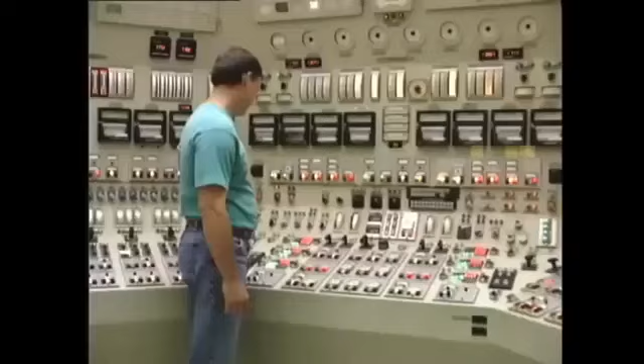We already studied the various turbine cycles and factors affecting efficiency at the beginning of this program. In this module, we'll look at the main features of turbine construction, including the various components and support systems such as gland steam, lube and hydraulic oil, and the condenser. The subject of turbine operation, control, and protection will be dealt with in the next module.

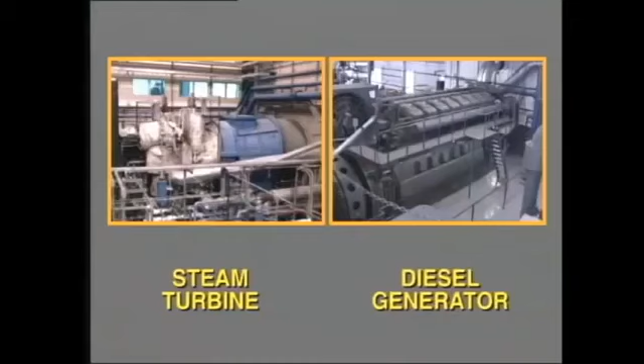The steam turbine is certainly one of the most popular prime movers, especially for driving large power generators. The size of steam turbines built and installed runs all the way from about 5 megawatts up to 1,000 megawatts or more. So what is it that makes the steam turbine the preferred prime mover in comparison with, say, the diesel engine? Well, there are quite a number of advantages, the main factor being that of physical size.

For example, a 30 megawatt steam turbine is probably smaller than a 5 megawatt diesel. Another advantage is that the steam turbine is far less complicated and contains very few moving parts. The moving parts are the rotor, which drives the generator, and the steam control valves and control gear.

The amount of vibration produced by a steam turbine generator and transmitted to the surrounding area is relatively low, provided, of course, that the machine is in good condition and is correctly installed and aligned. This makes for a quieter operating plant, particularly when compared with the diesel engine or even the gas turbine.

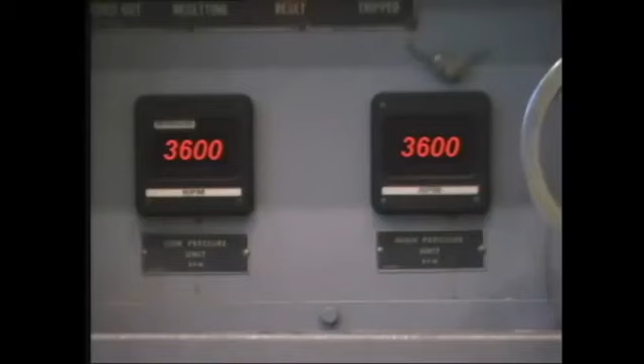The steam turbine runs at high speed, usually 3,600 RPM in North America or 3,000 RPM in Europe, and can therefore be coupled directly to a two-pole generator. Remembering that the diesel engine operates at around 200 RPM, we can see one of the reasons why the specific output of the steam turbine is much greater.

One other advantageous factor is the relative ease of controlling the output of the steam turbine. This is achieved simply by adjusting the amount of steam admitted to and flowing through the turbine. As we'll see later, admission valves, also known as control valves, are installed for this purpose.

The turbine stop valve, or valves, is located upstream of the control valves. In case of an emergency, the stop valve closes automatically, cutting off all steam supply to the turbine and bringing the machine to a halt.

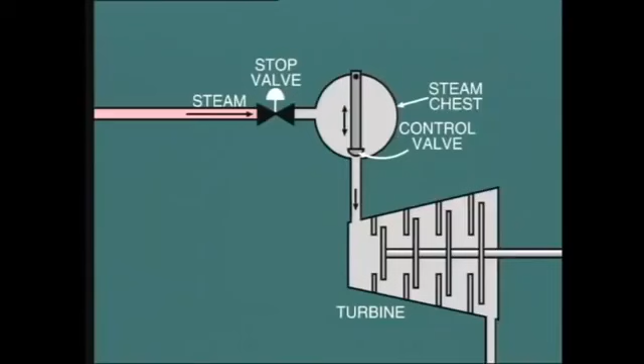This sketch shows us the major components of a 150 megawatt reheat turbine. We see here the rotor and the inner and outer casing or shell. This casing surrounds the rotor, leaving very fine clearances between the stationary and moving parts.

The objective of the inner casing is to direct the steam through the turbine. The inner casing is fitted into the upper and lower half of the outer shell, which in turn is supported on a heavy reinforced concrete base. The base must be firm enough to ensure rigidity. That is, it must permit no movement in the vertical plane which could upset the alignment of the machine.

The support bearings are allowed restricted movement in the axial plane to cope with expansion of the turbine, as we shall see later.

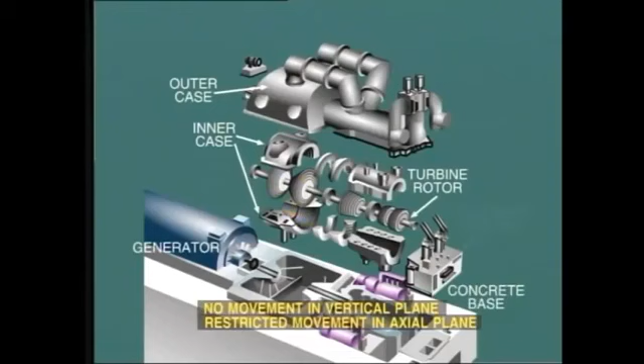Other components noticeable here are the governor pedestal, which supports the front end bearing, and the governor system. In this particular machine, steam from the stop valve is fed into steam chests located on either side of the turbine. The turbine admission valves are located in each steam chest to control the flow of steam into the turbine.

The turbine rotor is directly coupled to the generator rotor to transfer the mechanical energy produced in the turbine to the generator, where it is converted into electrical energy.

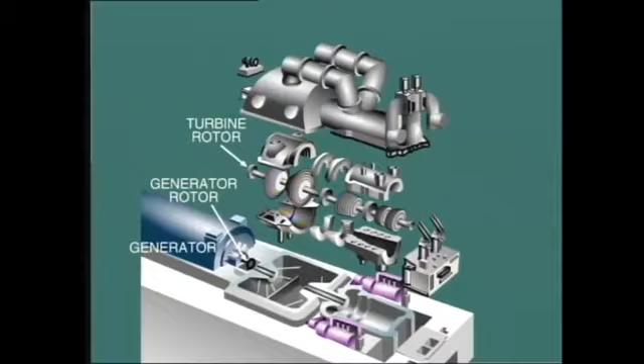Now, as we progress through this module, we'll be discussing the function of all of these components and many others. At this point, we're mainly concerned with identifying these items.

Make sure that you know where the following components are located on your particular turbines: the turbine outer casing, the generator, the turbine rotor, the generator rotor, and the associated coupling, the governor pedestal, the main steam stop valves, the steam chest and associated admission valves or control valves, the location of bearings which support the turbine rotor.

Now, the particular machine that we've been studying is made up of several cylinders, and we'll be looking at other cylinder arrangements in a moment.

But first, let's take a closer look at a single cylinder machine in order to help us understand the principles of turbine operation, how it actually functions and produces power.

Steam at high pressure and temperature, say 1800 psi and 1000 degrees Fahrenheit, is admitted at one end of the turbine. After passing through the turbine, this steam exits at a much lower pressure and temperature, say 50 psia and 250 degrees Fahrenheit for a typical back pressure turbine. However, if the turbine is of the condensing type, and this is far more common, the steam exiting from the turbine will be at a pressure far below atmospheric, say 1 psia, and at a temperature of about 100 degrees Fahrenheit. Clearly, the amount of energy in the steam exhausted from the turbine is much less than in the steam entering the turbine.

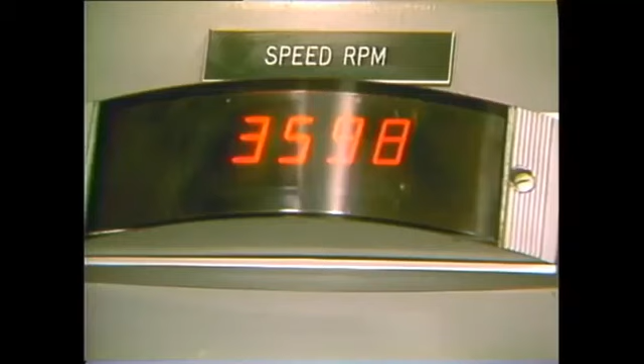The heat energy has been used to force the turbine rotor to rotate at high speed and consequently produce mechanical energy. But how does it do this? Well, the simple answer is that the turbine blades are designed to take advantage of the decrease in steam pressure and consequent increase in steam velocity.

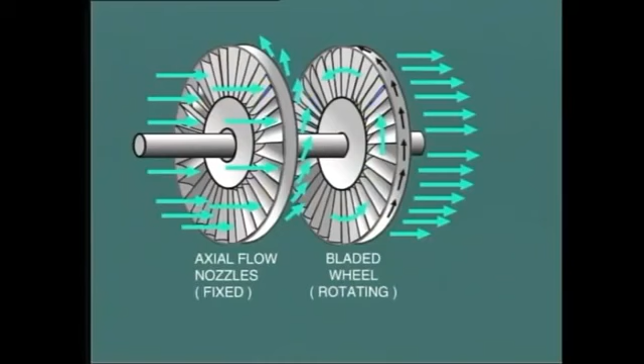The heart of the turbine, the bit that makes it work, is the relationship between the fixed and moving blades. The fixed blades guide the steam onto the moving blades. As the steam passes through the moving blades, it causes the disc to which they are attached to rotate, and consequently the shaft rotates. Each pair of stationary and associated moving blades are known as one stage. Most steam turbines contain many stages of blading. In this example of a single cylinder machine shown here, we have 7 stages. And do not forget, the stationary blade is always ahead of the moving blade.

Each pair of stationary blades is shaped to form a convergent divergent nozzle. However, the form of the nozzle is bent to receive the steam exiting from the previous moving stage, and then to turn and redirect the steam onto the next moving stage.

Now, before you raise the question, but what about impulse and reaction type blading? Let me say that in practice, when you're operating a turbine, it's not vitally important whether the blading is impulse or reaction. This is really a design and construction feature. However, it will certainly be worth our while to take a look at this subject, as the type of blading used does affect other structural features.

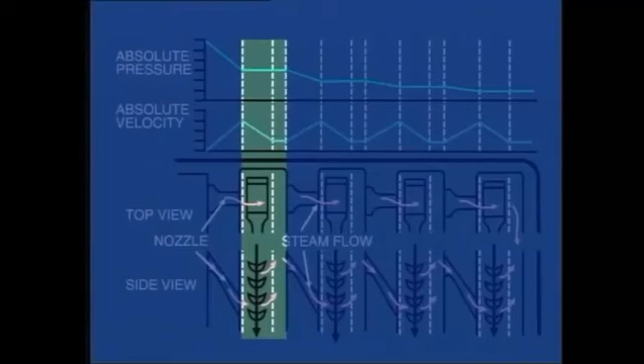By the time the steam leaves the moving blade, it has lost much of its velocity, and it then passes on through the next row of stationary blades. Again, the pressure falls and the velocity increases due to expansion of the steam, and once again this is directed onto the next row of moving blades, and so on. We can see that as a result of pressure drop, the velocity of the steam increases each time it passes through a set of stationary blades, but the velocity then decreases as the steam passes through the moving blades and gives up energy. Eventually, when the pressure has fallen to a low value, it can no longer expand and produce work, and it is exhausted from the turbine.

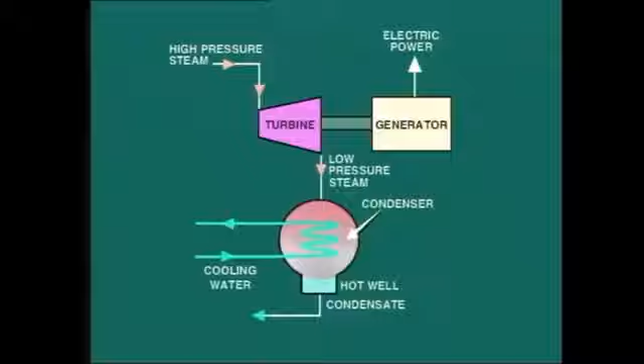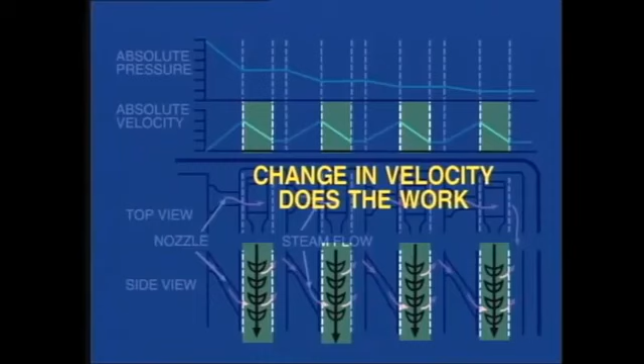This feature of impulse blading, that is, constant pressure across the moving stage, brings about a certain constructional advantage. As there is no pressure drop, there is no tendency for steam to leak around the outside circumference of the blades. Because of this feature, we will inevitably find that impulse blading is used in the high pressure stages of the turbine. In fact, you'll often see large holes bored through the wheel or disc in the higher pressure stages. This is done to ensure that there is no pressure differential across the wheel, and so maintain the correct impulse characteristic of the moving blades.

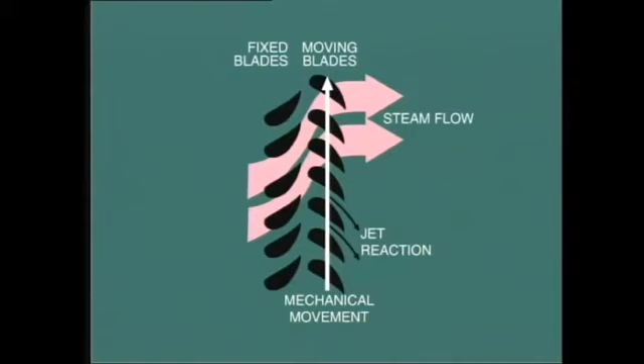Now let's move on to look at the characteristics of reaction-type blading. In this case, the mechanical force on the blade is caused by reaction as the jet of steam exits from the blade. This is the same concept as a jet engine.

With this type of blading, the moving blades are shaped in the same manner as the fixed blade, that is, in the profile of a curved nozzle. This causes the steam pressure to fall as it passes through the moving blade, resulting in an expansion of the steam and an increase in its velocity relative to the blade, causing a powerful jet action.

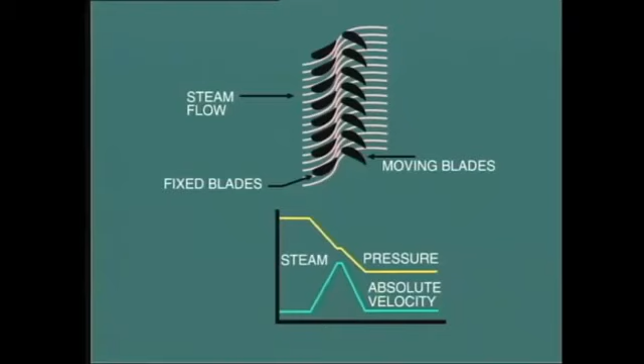As before, the exiting steam then passes into the next stage of fixed blades, where it is again expanded and redirected to enter the next set of moving blades. So you can see that in this type of blading, the pressure decreases as the steam passes through both the moving blades and the stationary blading.

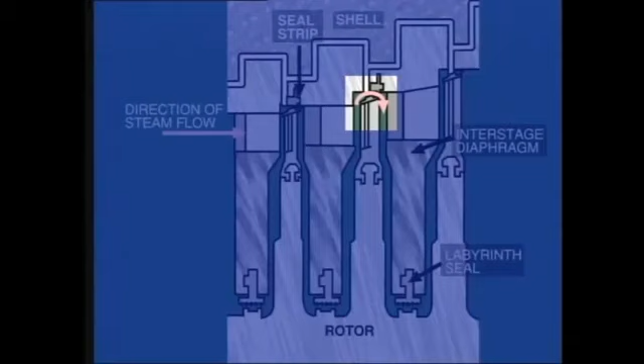Although the reaction turbine is efficient in its use of heat, there is always the potential for some losses due to steam leaking around the periphery of the moving blades, especially in the high pressure section. In order to reduce this tendency, a reaction turbine will normally have many more stages so that the pressure drop in each stage is lower.

Consequently, the machine will be physically longer. In practice, a compromise is reached, and today most turbines combine both types, using impulse blading in the high pressure stages and reaction blading in the low pressure stages.

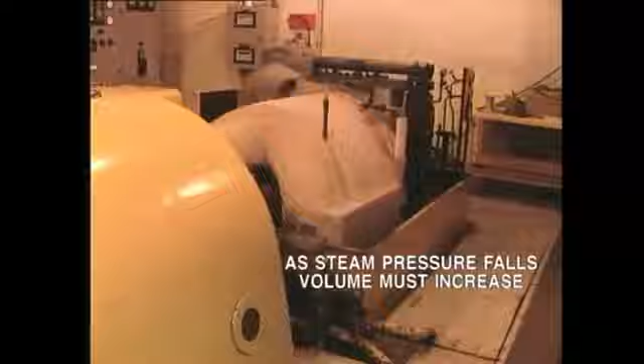1 pound of steam at 2,500 psia and 1,050 degrees Fahrenheit occupies a space of 1/3 of a cubic foot. At 500 psia and 500 degrees Fahrenheit, the specific volume is 1 cubic foot. At atmospheric conditions, the volume occupied by 1 pound of steam is 27 cubic feet.

And in the case of a condensing turbine, where we have steam exhausting at, say, 1 psia, the specific volume is 333 cubic feet per pound.

So one clear consequence of this is that we have to make the casing continuously bigger as we move from the high pressure to the low pressure end. This is very evident to the eye when we look at this single-cylinder turbine.

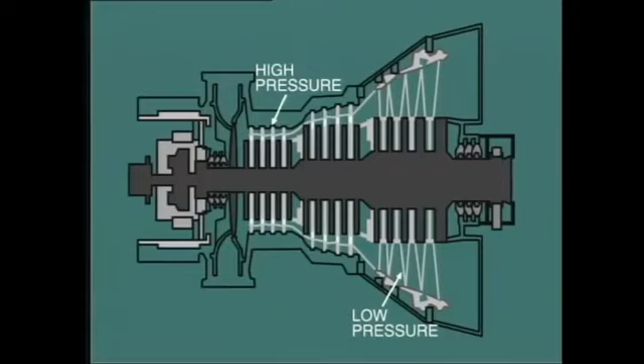But notice, it is not only the casing that must be made bigger, but the turbine blades must also be larger in order to utilize this low-pressure steam.

On turbines of high output, say above 100 megawatts, it becomes physically difficult to make the cylinder large enough to accommodate all of the low-pressure steam. To get over this problem, multi-cylinder arrangements are used, and let's look at some of these arrangements.

Most low-pressure cylinders are of the double flow type, where steam enters at the center and flows outwards in opposite directions. This provides some balance to the thrust and tends to keep the shaft centered.

As the steam path of the high-pressure and low-pressure cylinders is in series, all of the control is carried out at the steam inlet admission valves at the high-pressure end.

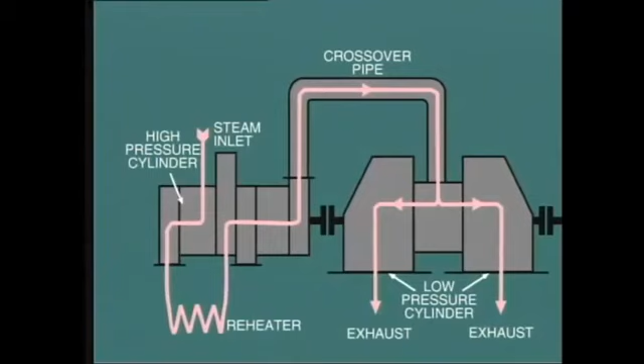The next development from this two-cylinder arrangement introduces reheat and the addition of the intermediate pressure stage of the turbine. A very common arrangement for reheat turbines up to about 250 megawatts is shown here. The high pressure and intermediate pressure cylinders are combined in one casing, but of course the steam path is quite separate.

Note that the concept of counterflow is also used here, with the steam flowing through the high pressure cylinder in the opposite direction to that of the intermediate pressure cylinder to help produce a balanced thrust.

As turbines become bigger and bigger, it is necessary to add yet further cylinders, and the arrangement shown here is typical for machines in the 500 to 600 megawatt range. As you can see, we have separate high pressure and intermediate pressure cylinders, and also it has become necessary to add a further low pressure cylinder in order to handle the high volume of steam.

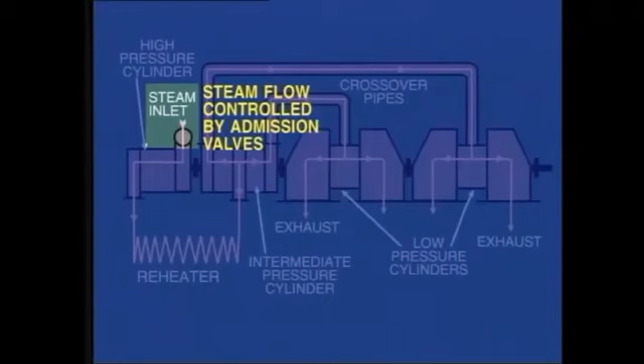With all of the configurations shown, the general control of steam flow through the turbine is achieved by adjusting the admission valves at the high-pressure inlet. However, note that with the reheat units, additional control valves, known as intercept valves, are fitted at the inlet to the intermediate pressure cylinder for protection purposes. We'll be discussing this in detail when we look at control and protection in the next module in this series.

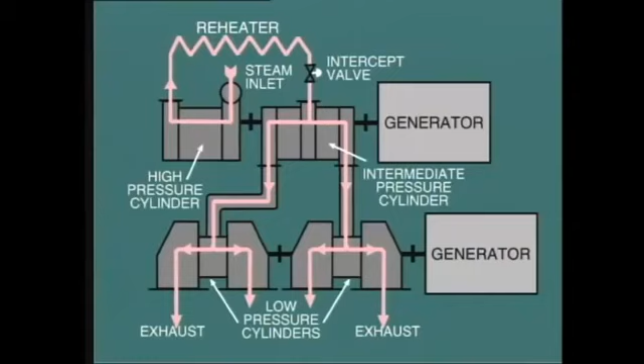Yet another cylinder arrangement used on earlier reheat machines is known as the cross-compound system, shown here. It really consists of two separate turbines, each coupled to their own generator, but interlocked through a common steam system. The high-pressure and intermediate pressure cylinders drive one generator, while the two low-pressure cylinders drive the other.

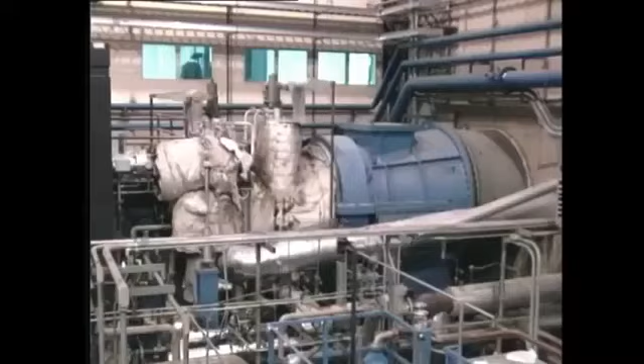Again, the steam flow through the combined turbine is controlled at the high-pressure inlet, thus controlling the output of both generators. Of course, the large reheat units that we have been considering would typically be found in central power stations of large utility companies. More recent installations, particularly in industrial situations, are likely to be smaller units, probably within the range of 60 to 150 megawatts.

In order to examine some of the basic construction features, let's take a look at this single-cylinder machine. Steam is supplied to the steam chest from the boiler after passing through the turbine stop valve. The amount of steam passing through the turbine is regulated by adjustment of steam admission valves. This in turn controls the output of the turbine and the coupled generator.

At various stages along the steam path, steam is extracted from the turbine. This extraction steam is commonly used for feed water heating, but there may be other applications as well. The concept is that the extracted steam is put to good use after performing some work in the turbine. You will remember that we discussed this in the first tape in this series when we looked at efficiency.

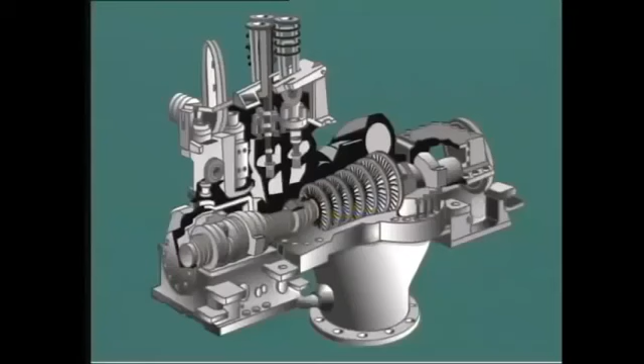The turbine rotor is supported on journal bearings which are located at each end of the cylinder. It is essential that these bearings retain their correct alignment, as the clearances between the rotating parts and the fixed parts of the machine are extremely small.

A thrust bearing is located along with the journal bearing at the governor pedestal in order to locate the shaft and prevent movement in the axial direction. What do we mean by this?

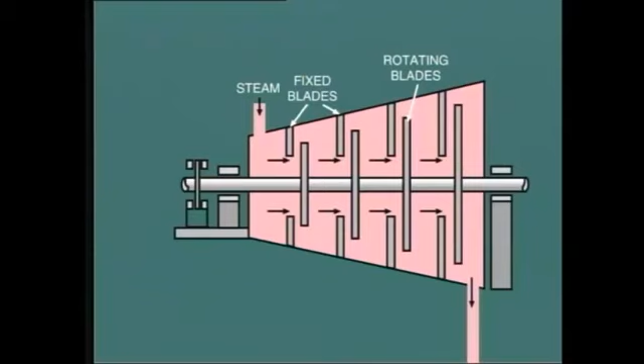Well, in this single-cylinder arrangement, the flow of steam through the turbine tends to push the rotor towards the generator. If this thrust was not contained, the rotating blades could conceivably come into contact with the stationary blades of the next stage and cause quite a catastrophe. To prevent this occurrence, a fixed collar on the shaft is held in position by lubricated thrust pads.

During construction and maintenance of the machine, these pads are carefully set to ensure that the correct clearances exist between rotating and stationary parts. Allowance must be made for the casing to expand as it becomes heated by the steam flow.

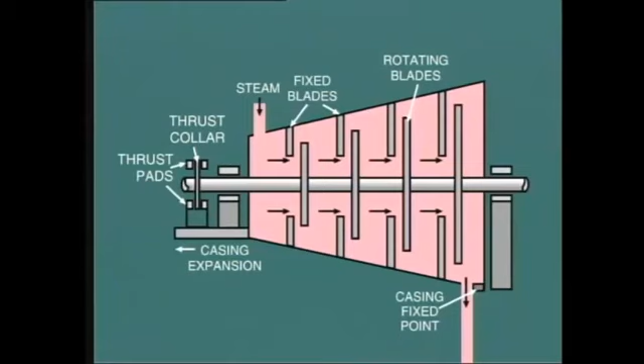In a single-cylinder machine like this, the normal method is to anchor the machine solidly at the low-pressure end, that is, at the turbine exhaust, and allow the front end pedestal to move forwards. In large machines, the expansion in this longitudinal direction may be over 1 inch, that is, 25 millimeters.

In this particular machine, the pedestal is fixed to a flexible support which allows the movement to take place. A more common arrangement on larger machines is to fit the base of the pedestal with sliding feet to allow free movement in the axial direction.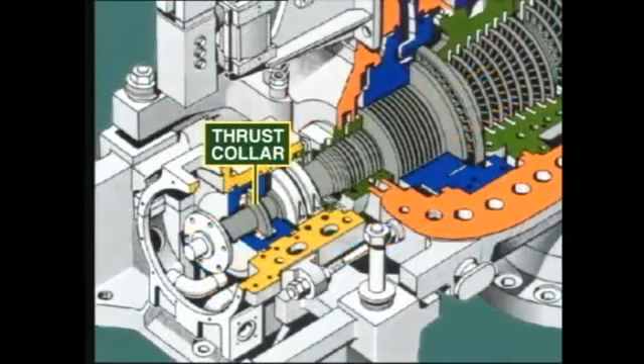Now let's take a close look at a typical rotor. Moving from the front end to the rear, we see first the thrust collar, which bears against the thrust pads during operation. Just ahead of this is the portion of the shaft which sits in the journal bearing. This area should be perfectly smooth with no indentations or marks.

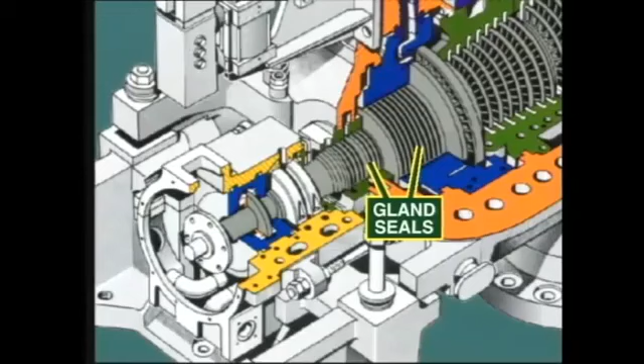Moving further along, we come to the gland seals, which are needed to reduce steam leakage along the shaft. We'll be talking about this arrangement in more detail later.

We now come to the series of wheels, or discs as they are known, which extend along the length of the shaft. Blades are fitted all around the periphery of the discs and are held firmly in place at the roots. On many machines, further support is provided by fitting rings or shrouds around the outside of the blading. Note the much larger size of the low-pressure blades, in order to handle the increased volume of steam at this end.

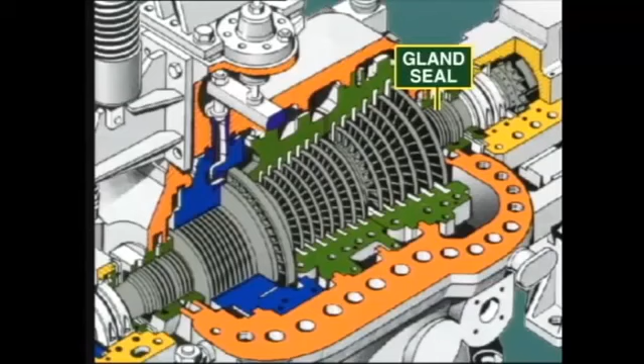Continuing our examination along the length of the rotor, we come to the low-pressure end gland seal. This is at the interface between the casing and the rotor. Just on the outside of the casing is fitted the low-pressure end journal bearing. At the very end of the shaft, we find the coupling, which is used to join the turbine and generator rotors.

In addition, at this end of the shaft, we will often find a large gear drive, which engages with the turning gear. As we'll see later, the turning gear allows us to rotate the rotor at very low speed, say 1 RPM, without having steam pass through the machine. This is used during shutdown to ensure even cooling and so prevent distortion of the rotor.

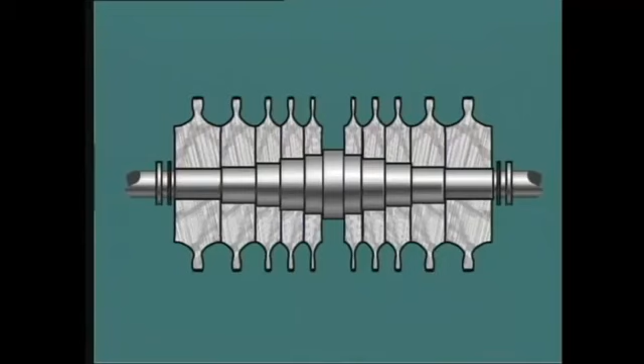More about this later. In earlier machines, the discs are shrunk onto the rotor shaft. A problem with this type of construction is that in some cases, steam may leak along the shaft and cause distortion due to differential heating, as well as a loss of efficiency.

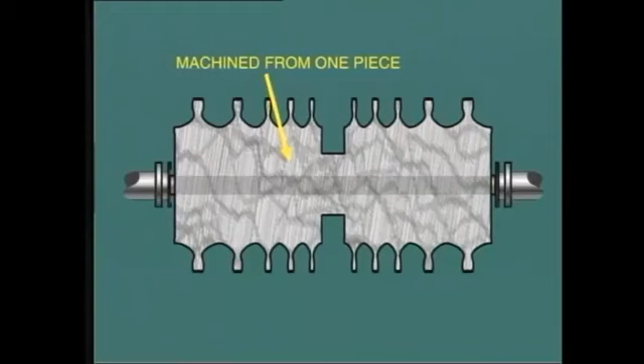To overcome this problem, in modern turbines, the discs and the shaft are forged in one piece and then machined. Yet another method of building up the rotor is by welding discs together and so eliminating the shaft.

Now remember that in between each disc and associated blades, we have to fit the stationary blades. Let's see how these are held in place. The first time we examine a turbine, we might imagine that these stationary blades could be fixed to the outer casing to line up with the moving blades, like this.

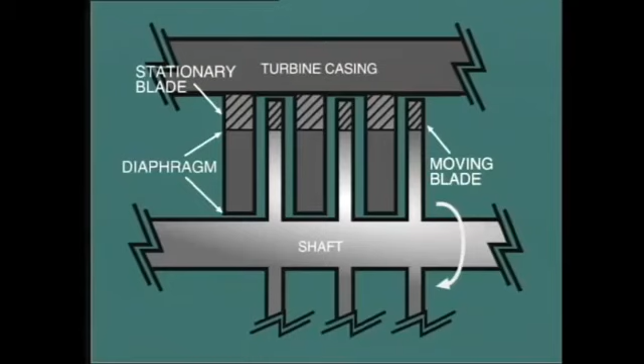But we do have a problem with this arrangement. What is there to stop the steam passing around the blade instead of through it? In order to prevent this, a shield known as a diaphragm is constructed, extending all the way from the inner diameter of the stationary blade down to the shaft, leaving a small clearance to allow rotation.

The diaphragms are sized to leave a small inside clearance to allow the shaft to rotate. Seal strips are fitted at this location to prevent steam leakage. After all, we want all steam to pass through the blading, not around it. We'll be talking about steam seals later.

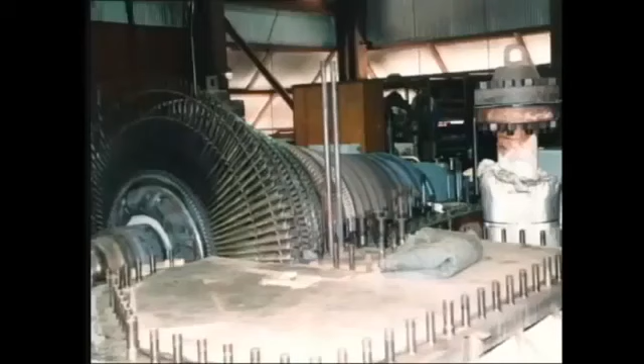When the turbine is assembled, the rotor must be very carefully lowered into place so that the discs fit perfectly between the respective diaphragms. Once the rotor is in place, the axial clearance can be adjusted and finally fixed in place at the thrust bearing.

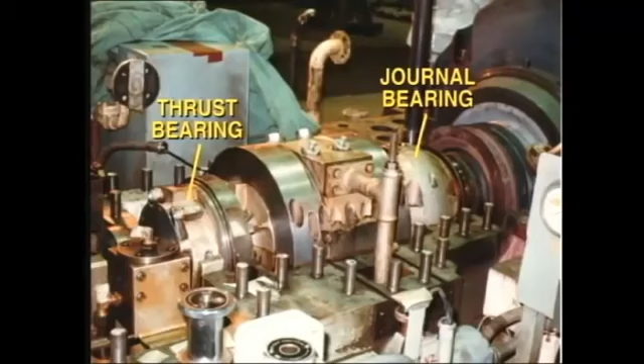Similarly, the journal bearings must be adjusted to provide correct alignment with the generator rotor. When all adjustments are complete, the top half of the casing, which is a mirror image of the bottom part, is very carefully lowered into place and finally bolted down.

The exterior of the turbine casing must be very well insulated to prevent heat loss. With temperatures at the high pressure end in the region of 1,000 degrees Fahrenheit, we could suffer a considerable loss of efficiency, as well as an uncomfortable turbine room, if the insulation was inadequate.

Now, in this segment, we've looked at general features of turbine construction. Using this information as a guide, make sure that you check and learn the structural features of your own turbines.

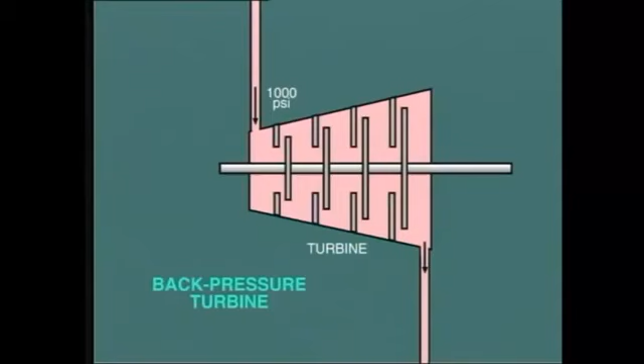Remember, there is very hot steam at substantial pressure inside the casing at the high pressure end of the machine. So there is the potential for a considerable amount of this hot steam to leak out through the space between the rotating shaft and the casing.

And would we not have the same condition at the low pressure end? Well, yes, if this is a back pressure turbine with a positive exhaust pressure at, say, 50 psi or over. Although the pressure and temperature is less, there would still be leakage between the casing and the rotating shaft.

But what about the case of a condensing turbine? Well, in this situation, there is a vacuum inside the casing at the low pressure end. So instead of steam leaking out, air would leak in, and we do not like that either. It could lead to a loss of vacuum and consequent loss of efficiency.

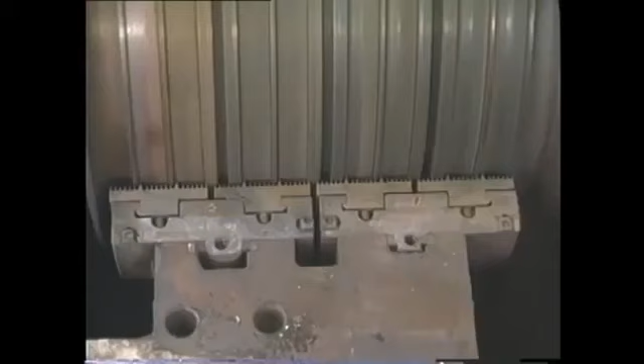In order to reduce this leakage as far as possible, gland seals are located at each end of the casing. The aim of the seal is to provide a high resistance to the flow of steam or air. This is achieved by the use of a labyrinth seal.

The rotating portion on the shaft is slotted like this, while the stationary portion consists of thin metallic strips which are pressed into the rotating grooves by very light spring pressure. The resultant labyrinth path considerably reduces the leakage of steam out or air in.

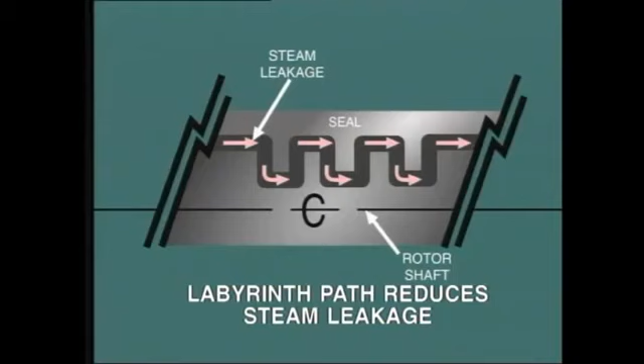Even so, there will still be some leakage of steam at the high pressure end through the gland seal. This leakage steam is extracted from the gland and fed into a low-pressure extraction point. The leak-off valve automatically adjusts the pressure within the gland steam header to maintain approximately 5 psig.

But even at that low pressure, there will still be some leakage along the shaft into the turbine room. In order to prevent this steam from getting into the turbine room, it is drawn from the outside of the gland seal by a slight vacuum, which is produced by the gland steam exhauster. Some heat is recovered from this small amount of steam, by passing it through a heat exchanger in the condensate system known as the gland steam condenser.

Now let's see what's happening at the vacuum end of the turbine. Well, we definitely do not want air to enter the casing, even the small amount that may flow across the labyrinth seal.

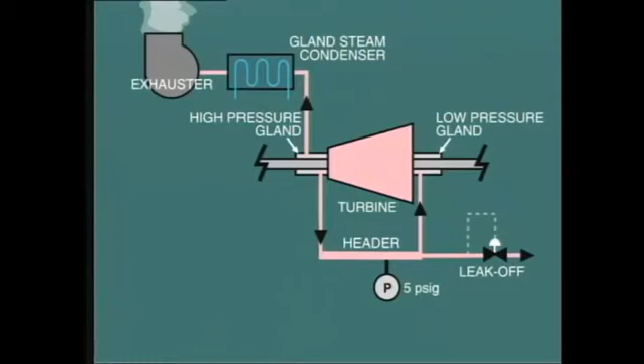In order to prevent the leakage of air into the casing, low-pressure steam is provided from the header to the low-pressure gland seal. This results in a small amount of steam entering the turbine casing, and this is far preferable to air. Of course, some of the steam will also try to pass along the shaft in the opposite direction to atmosphere.

But this is captured by the gland steam exhauster in the same manner as for the high-pressure gland seal. So we can see that leak-off steam from the high-pressure end is useful in providing sealing steam at the low-pressure end. As the load changes, the leak-off valve opening adjusts to maintain the appropriate header pressure.

But how does the system work when we're preparing for startup? In this situation, we need to pull a vacuum in the turbine and condenser before admitting any steam into the turbine. So in this condition, we have no leak-off steam.

Instead, live steam is supplied to the gland steam header. The live steam supply valve is set to control the header pressure at about 3 psi to coordinate its operation with the leak-off valve. When the turbine comes on load, the leak-off steam from the high-pressure gland feeds into the header and so raises its pressure.

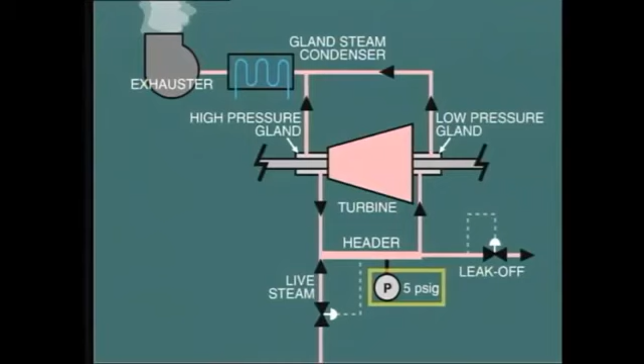When the pressure gets to 3 psi, the live steam supply valve will close. When the pressure rises to 5 psi, the leak-off valve will open enough to maintain this pressure.

Remember that there are two basic circuits in the gland steam seal system. First, the gland steam header, which supplies steam to the seals or dumps excess steam. The second circuit extracts leakage steam from the extremities of the glands and passes it through a heat exchanger and the gland steam exhauster. Make sure to check and learn details of your own gland steam system.

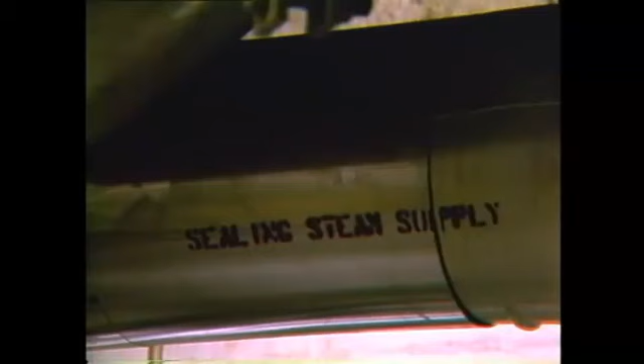Sealing strips are similarly used in other parts of the turbine where we need to eliminate or at least reduce steam leakage. A typical example is the interstage seals, which are fitted at the inner circumference of the diaphragms where the shaft rotates. In all cases, the seal strips are made of very thin, soft, metallic material. They rub on the shaft and reduce the leakage as much as possible.

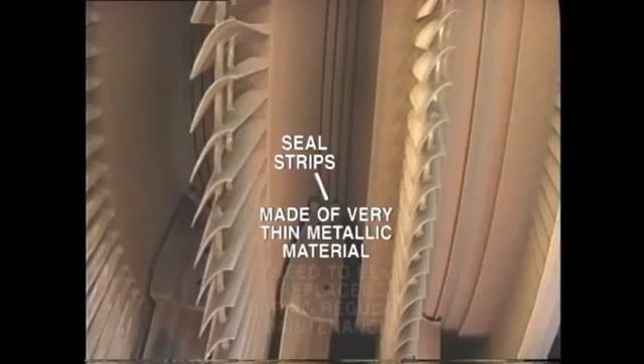Of course, as time passes, the sealing strips wear and need to be replaced during regular maintenance. We'll be discussing this aspect in another module in this series. Well, so much for sealing systems.

Another very important support system that is essential for turbine operation is that of lube oil and hydraulic oil supply. Let's look at the lubricating oil system first. A continuous flow of lube oil must be circulated through all of the turbine and generator bearings.

Typically, the arrangement would look like this for a single-cylinder machine. The lube oil supply header is maintained at about 50 psi, and from here the oil is force-fed through each of the bearings, including the turbine thrust bearing. After passing through the bearings, the oil flows into the return header, and from there to the lube oil tank. The lube oil is pumped from this tank in order to feed the supply header. So we have, in effect, a closed cycle. But there are some other important features.

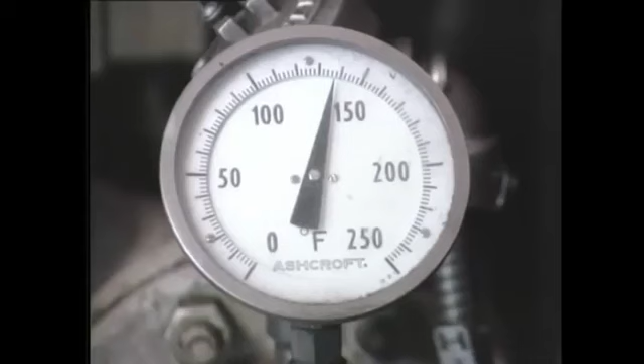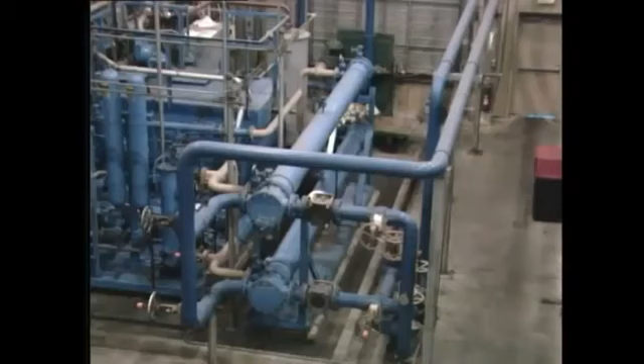First, the need for cooling. As the lube oil passes through the bearings, it picks up heat and its temperature rises, conducting heat away from the bearings. The effect of this would be to continuously raise the temperature of the oil in the tank. In order to prevent this, a cooler is provided, and this is usually placed in the path of the lube oil supply. The lube oil cooler is usually of the tube and shell type, with cooling water passing through the inside of the tubes. It is normal to fit two coolers so that one may be taken out of service for cleaning at any time. Thus, the change can be accomplished without interrupting the supply of oil.

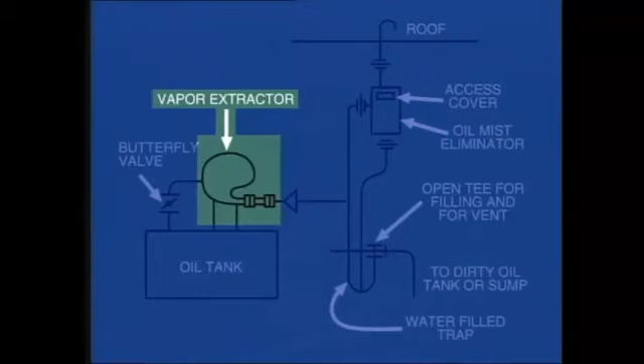Actually, the raising of lube oil temperature in the tank has a slight advantage in that it allows any moisture contained in the oil to vaporize. For this reason, a vapor extractor is fitted to the top of the tank to draw off any vapor and discharge it to atmosphere. But where does the moisture come from? Well, this may be picked up by the oil in its passage through the bearings with their proximity to the gland steam. The vapor extractor will also remove any traces of hydrogen that may infiltrate the lube oil from the generator cooling system. The subject of hydrogen cooling and its associated seal oil system is discussed in the power generation module of this program. More serious yet, the oil is likely to pick up fine pieces of metal and other contaminants in its route through the system.

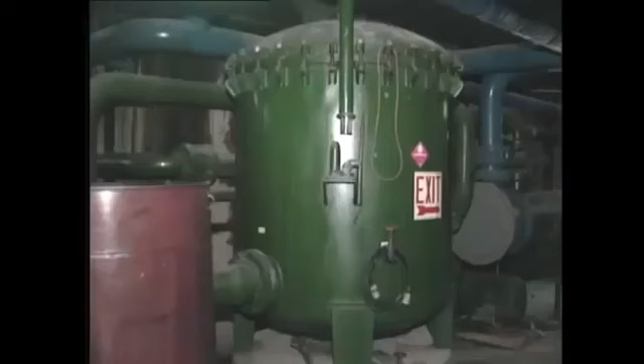And these contaminants could cause serious damage to the bearings and therefore must be removed. Most lube oil systems include a filtering system within the circuit. This may consist of bag-type filters within the oil tank, or external cartridge filters, or a centrifuge which continuously circulates oil from and back to the tank. Maintaining the cleanliness and purity of the oil is extremely important to good turbine operation. Usually, the lube oil is sampled at regular intervals, say monthly or bi-monthly, and analyzed for impurities and other characteristics.

The supply of lube oil is so vital to the operation of the turbine and generator that a standby pump must always be provided and maintained, ready for startup on automatic control. But one question comes to mind. What would happen in the case that we lost all auxiliary AC power? This could happen, for example, in the case of a turbine generator trip in a facility with no station service backup. We'd then be faced with the prospect of the turbine generator running down without the circulation of lube oil, a condition that could conceivably damage all of the bearings. In order to prevent this potential disaster, many machines are equipped with a DC oil pump, which would be fed from the station battery in such an emergency.

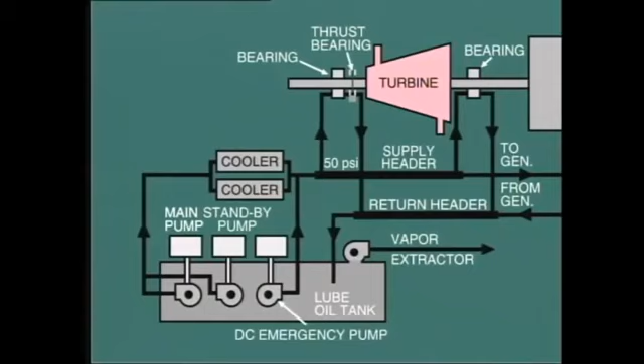Now let's move on to look at the hydraulic oil system. This system operates at a much higher pressure than the lube oil system, even as high as 2,000 psi in some machines. Fireproof synthetic oil is often used as a safety feature. But what is the purpose of this hydraulic system?

The high-pressure oil is used as the medium for operating the turbine control system. For example, the servo mechanism, which provides the force to adjust the turbine admission valves, is motivated by hydraulic oil, hence the high pressure needed. Hydraulic oil is also used to hold open the turbine stop valve during operation and hold open the extraction line non-return valves during normal operation.

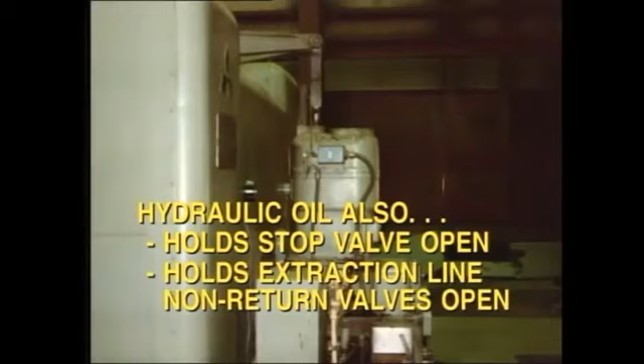Hydraulic oil is employed to provide a relatively large force in response to a small signal from the control system. For example, the servo mechanism we just mentioned is really a power amplifier that responds to a small movement and force of, say, a few pounds from the governor system, and turns this into a force of several tons to operate the turbine valves against the high-pressure steam.

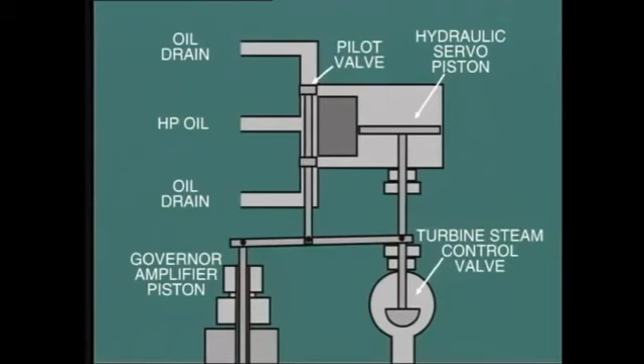But look, this movement downward also moves the operating lever, and this moves the pilot valve downward, so closing off the servo cylinder, which is now in a new position.

We'll be looking in much more detail at the turbine control system in the next module in this series. For now, we're just looking at applications for hydraulic oil.

In many turbines, the same grade of oil is used for both applications, so the hydraulic and lube oil systems are combined to utilize the same oil tank and the same pumps. The main oil pump is mounted in the front end pedestal and is driven directly from the turbine shaft.

Diagrammatically, the scheme looks like this. When the machine is in operation, the main oil pump here delivers oil at 250 psi. This supplies the hydraulic oil system. At the same time, it provides oil to the lube oil header at 50 psi through a reducing valve.

During startup and shutdown, a motor-driven high-pressure oil pump is used. Again, this supplies both the hydraulic oil system and the lube oil system. In this arrangement, this pump is known as the auxiliary oil pump, since it is the main standby to the shaft-driven pump. When the turbine is out of service and operating on turning gear, we still need to provide lubrication to the bearings.

However, in this situation, with hydraulic oil not required, it would be inefficient to run the large auxiliary oil pump. Instead, a small pump is installed known as the turning gear oil pump, and this provides sufficient oil for lubrication only. And as before, there is a DC emergency pump which will provide lubrication in the case that all AC service supply power is lost.

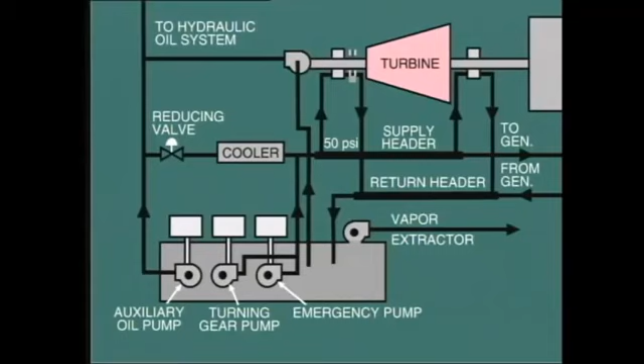So we can see that there is in fact a hierarchy of oil pumps with automatic startup based on pressure readings. If the main oil pump fails and the pressure falls, the AC auxiliary oil pump will cut in automatically. If the lube oil pressure falls, the turning gear oil pump starts up automatically. And if this consequently fails, the DC oil pump will start.

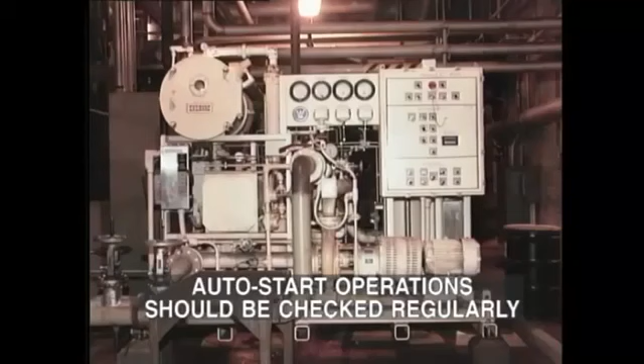As with all automatic devices, the pump auto start operations should be checked on all pumps regularly. Make sure that you check out the details of your own lube oil and hydraulic oil systems. You should be thoroughly familiar with the location of all pumps and controls for these pumps.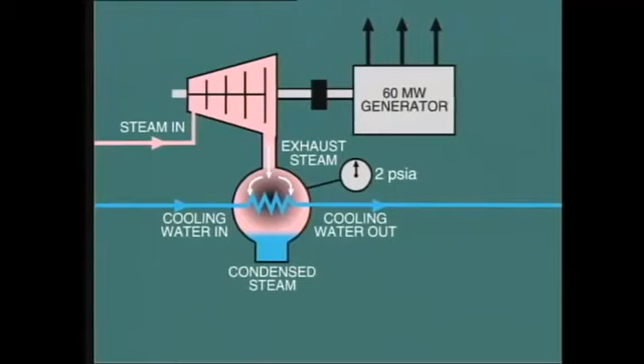The actual pressure in the steam space of the condenser and correspondingly at the turbine exhaust will be about 1 to 2 psia, depending on actual local conditions.

The steam space in the condenser is filled with low-pressure steam exhausted from the turbine, which quickly turns to water droplets as it comes into contact with the outside surface of the cooling tubes. Most condensers contain several thousand tubes about 1 inch in diameter, usually made of non-corrosive metals such as cupro-nickel, brass, and even stainless steel.

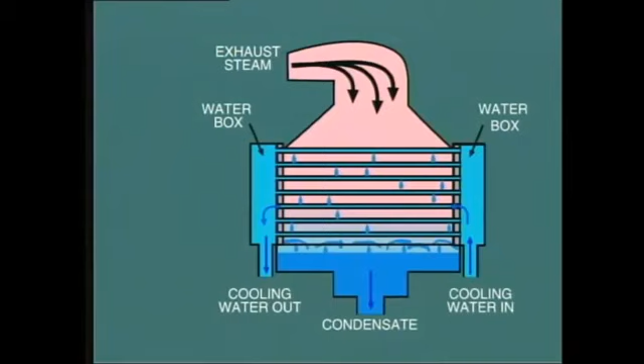Cooling water passes through the inside of these tubes, while steam condenses on the outside of the tubes. This so-called condensate then falls to the bottom of the condenser, where it is collected in a vessel known as the hot well. From here, the condensate is removed by the condensate pump and circulated back to the system.

In order to condense steam into water, all of the latent heat must be removed. That is about 970 BTU per pound. In order to achieve this, a very large quantity of cooling water is required.

For example, a 60 megawatt unit may require as much as 35,800 GPM of cooling water to pass through the condenser. Such a large quantity of water cannot be supplied by a water treatment system. Therefore, the condenser cooling water, or circulating water as it is known, is normally taken from a nearby river or lake or even the sea.

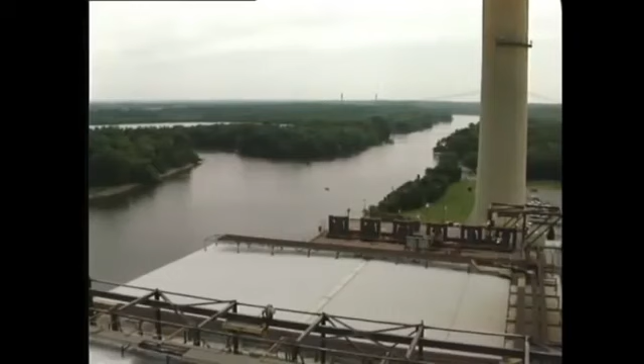In some cases, a closed circuit system is installed using a cooling tower. We'll be talking more about the actual circulating water system and its components later in this program. For now, we're concerned with the condenser and other vacuum equipment.

In the arrangement shown here, the circulating water enters at one end of the condenser, filling the inlet water box, then passes through the tubes into the outlet water box. From here, the water circulates back to the system. This particular arrangement is known as a single-pass system.

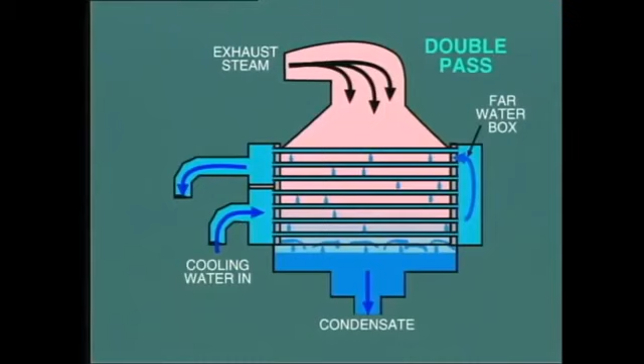In many installations, a double-pass condenser is used. Here, the water enters at the bottom, passes through the lower tubes, arrives at the far water box, and then is circulated back through the upper set of tubes, exiting from the upper water box.

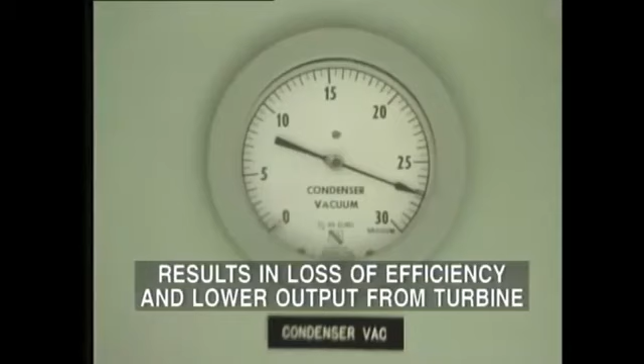Over a period of time, the circulating water may leave some deposits inside the tubes. The consequence of this is a reduction in heat transfer and a rise in the back pressure inside the condenser. This results in a loss of efficiency and lower output from the turbine.

The circulating water may also deposit algae, mussels, and other marine life on the front of the tube plate, reducing the flow of water through the tubes. Again, the result is a loss in cooling and a consequent rise in back pressure.

Generally, the condenser needs to be cleaned manually from time to time, and in most cases, this entails shutting down the turbine. There are, however, some machines which are designed to allow one half of the condenser to be cleaned, while the other half remains in service, and the unit continues operating at reduced load.

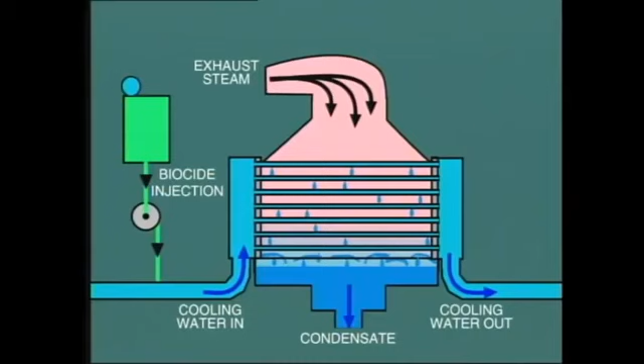In an attempt to maintain a clean condenser, chemical injection is carried out at some installations. Adding a biocide to the circulating water can reduce or eliminate the growth of algae. Sulfuric acid may also be added in some plants where a closed-cycle cooling tower system is used.

The objective is to lower the pH slightly to about 6.5 in an attempt to prevent scale forming inside the tubes. Another chemical used on closed-cycle systems acts as a dispersant with the aim of keeping solids in suspension and preventing deposits from forming on the inside tube surface.

Many condensers are fitted with a siphon connection on top of the water box. The objective of this vacuum connection is to ensure that the water boxes remain completely full of water so that all of the cooling tubes remain effective.

But how could it be otherwise? Well, the circulating water will likely contain air bubbles which may be released at the top of the water box, forming a large air pocket. In time, as the air pocket increases, the level of the water at the top of the water box falls, and consequently there will be no water flow through some of the tubes.

The result of this reduction in heat exchange will be that the condenser is less effective and the turbine back pressure increases. The siphon connection prevents this from happening by drawing off the air at the top of the water box and piping this into a vacuum tank.

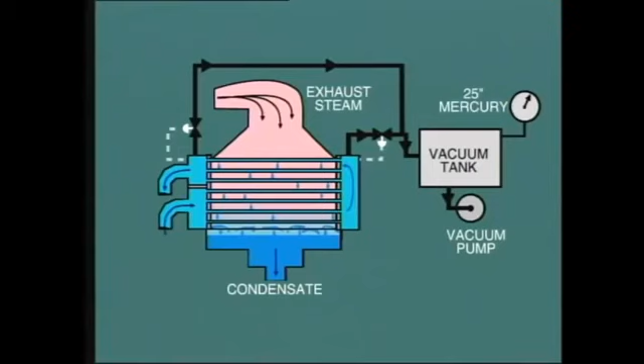The vacuum in the tank is maintained at about 25 inches of mercury by small vacuum pumps that are intermittently operated. A water level sensor in the water box operates a control valve on the siphon connection. When the level falls below a set level, the valve opens and air is drawn out, allowing the water level to rise. When the level rises to fill the water box, the control valve closes.

The problem of air accumulation may also occur inside the steam space of the condenser. Remember that this area operates under a negative pressure, a vacuum. Therefore, any leakage by valves, piping, or flanges will allow air to leak into the steam space of the condenser instead of steam leaking out.

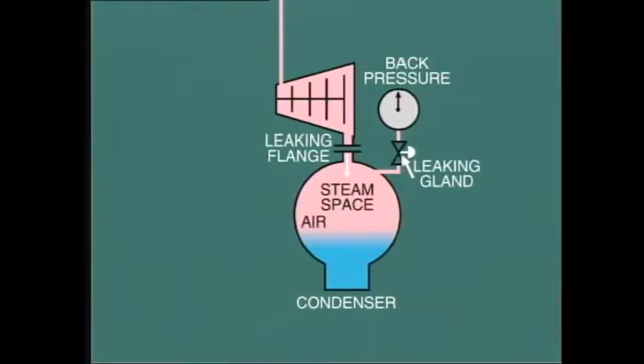Also, some incondensable gases, such as oxygen and carbon dioxide, may be released from the steam as it condenses. There is a tendency for these gases, plus any small amount of leakage air, to accumulate inside the steam space and eventually cause the back pressure to rise, reducing turbine efficiency.

In order to remove air and gases from the steam space, vacuum devices are fitted, such as a steam ejector and a vacuum pump. This air removal equipment is connected to a specific location in the condenser known as the air box. In this area, additional cooling tubes are concentrated to ensure that the steam condenses and only air and gases are removed. In many plants, the discharge from the vacuum equipment is monitored to provide a measure of air leakage into the condenser.

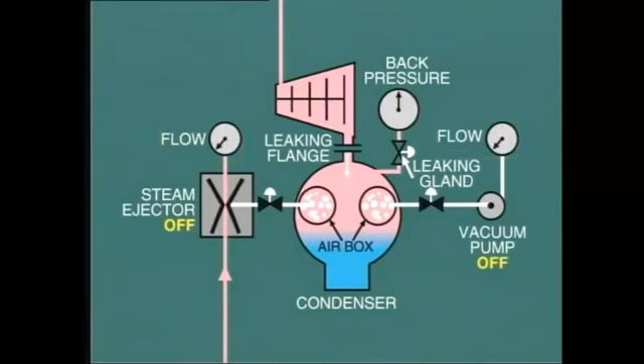During normal operation, this air leakage should be quite small. In fact, a good test of this during operation is to shut down the vacuum pump or steam ejector and observe the rate at which the back pressure increases. This should be quite slow, say 1 inch of mercury in about 30 minutes.

Compare this with the change which would take place if all of the circulating water flow were to cease, perhaps due to a trip of the circulating water pumps. In this case, with no condensing taking place at all, the back pressure would rise immediately, and the turbine would have to be tripped. In practice, this takes place automatically, and we'll be discussing this when we look at protection devices in the next module.

So we can see that during normal operation, the vacuum equipment is intended to maintain the vacuum in the condenser, not to create it. However, we also depend upon the vacuum equipment to draw a vacuum before startup. In this situation, before steam is admitted to the turbine, the condenser and the turbine are full of air. In order to remove this air, the vacuum pump or steam ejector must be placed in service and so pull a vacuum inside the unit.

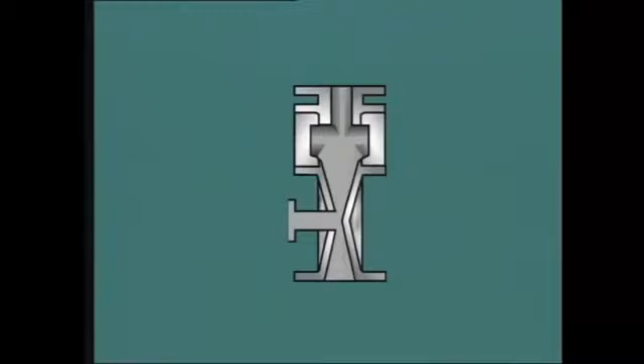Let's see how the steam ejector works. This functions on the principle of the Venturi nozzle, like this. When high-velocity steam passes through this nozzle, it creates a vacuum at this convergent point. This is the point which is connected to the air box in the condenser. The air enters the nozzle and is mixed with the steam passing through.

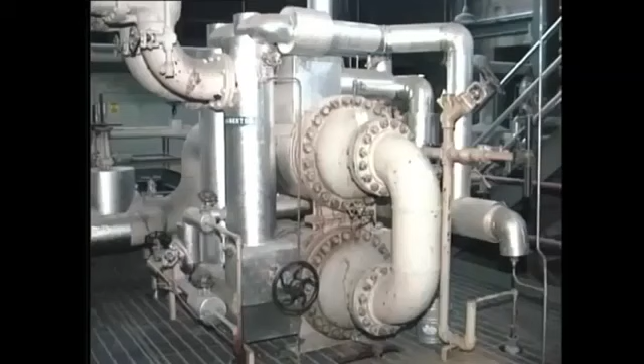On a startup ejector, also known as a hogging ejector, this mixture is discharged to atmosphere. However, the requirement for air removal when the turbine is in service is much less. Therefore, the on-load ejector uses smaller nozzles and has some heat and steam recovery.

As before, air is drawn from the condenser by the primary ejector, and the air and steam mixture discharges into a heat exchanger to condense the steam. The cooling medium is usually condensate, so all of the heat is retained within the cycle from the intercooler. The air is now drawn into a second stage ejector, which is at quite low pressure, that is, a modest vacuum. From here, the air and a small amount of steam is exhausted to atmosphere.

The creation and maintenance of vacuum in the condenser is an exceedingly important part of turbine operation, and we'll be looking at this in more detail in the next module in this series, when we focus our attention on turbine operation and control. Make sure that you learn all of the features of the condenser and vacuum equipment which is installed in your plant.